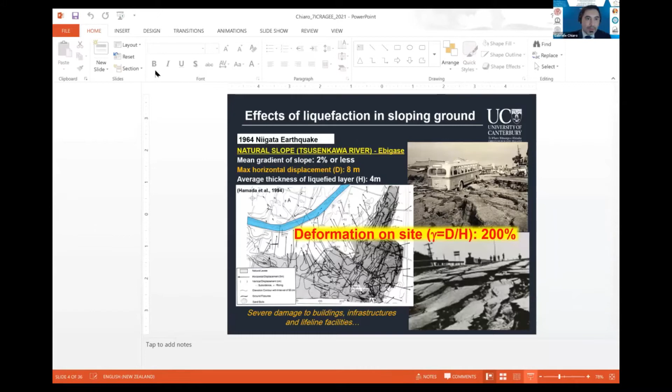It is my great pleasure to deliver this State of the Art and Practice lecture, and I would like to thank the organizing committee for giving me this great opportunity. I just realized my bio was a bit old since we have COVID - in the meantime, I was promoted to associate professor at the University of Canterbury.

The topic I'm going to cover today is the cyclic resistance and large deformation characteristics of sand under sloping ground conditions, and I will provide some insight using a state-of-the-art apparatus, the torsional shear apparatus, which is capable of achieving extremely large deformation.

This is the outline of my presentation. I will start with some background information and then go through the key objectives of the research that I'm going to summarize today. This is research that started more or less 10 years ago in collaboration with the University of Tokyo. Then I will talk about the testing apparatus, and then I will show the testing material and briefly talk about the procedures.

Then I will really focus on the test results, and I will talk about the failure modes observed in the laboratory. And then I will move on to the cyclic resistance of sandy soils, looking from small strains up to extremely large strains, and I will provide some new insight regarding the large strains. Then I will talk about the strain localizations that can be observed in the laboratory in liquefied soils.

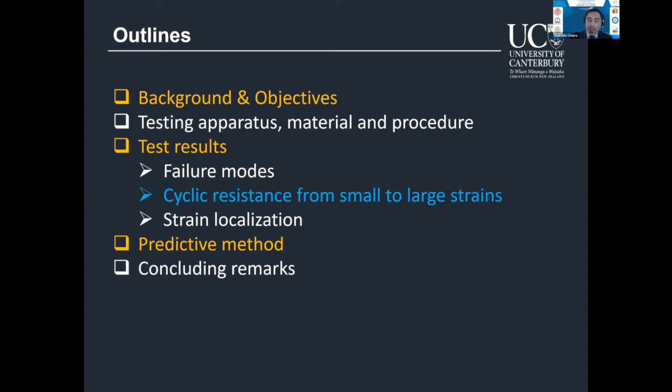So let's start with some background. The photo shown here shows the failure of a slope that occurred in 1964 in Japan following the Niigata earthquake. It was a moderate, gentle slope, with an inclination of only 2% or even less.

But as you can see from the photos, the damage to building infrastructure, roads, and lifeline facilities was quite severe. So it's only a 2% slope gradient, but it's a slope made of clean sand, dune sand, which was very close to the river. In fact, the slope moved toward the river.

The slope moved for about 8 meters, and the photos and damage associated with the liquefaction are shown in these historical photos. The deformation was 8 meters, and if you consider the average thickness of the liquefied layer to be 4 meters, that means the deformations on site were on the order of 200%, extremely large shear deformations.

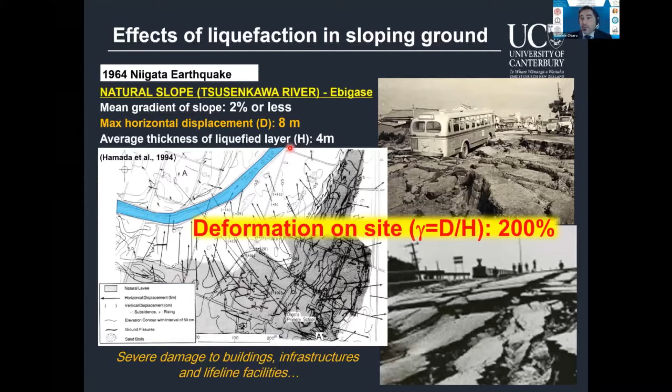So this is a historical case, but there are also more recent cases. For example, in 2015, these two photos, A1 and A2, show the liquefaction of non-plastic silty soil, with fines content of more or less 90% silt. But you can see evidence of liquefaction here, the typical sand boils and some fissures.

The liquefaction occurred in a gentle slope, again with an inclination of 1 or 2%, near the Trishuli River. As you can see here, there were large fissures and lateral spreading for many, many meters, extending backward from the river about 50 or 100 meters.

The other case I'm showing here is the failure of a slope that occurred in Japan due to the Kumamoto earthquake. In this particular case, it's a volcanic soil, pumice soil, weathered pumice soil, which was sandwiched between impermeable layers of clay. I will come back to this particular slope later on with more information.

The peculiarity is that the slope again was only 6% in terms of inclination, but the soil covered a distance of 600 meters from the source to the deposition area, and on the way impacted a new residential complex, destroying 7 houses and killing 5 people.

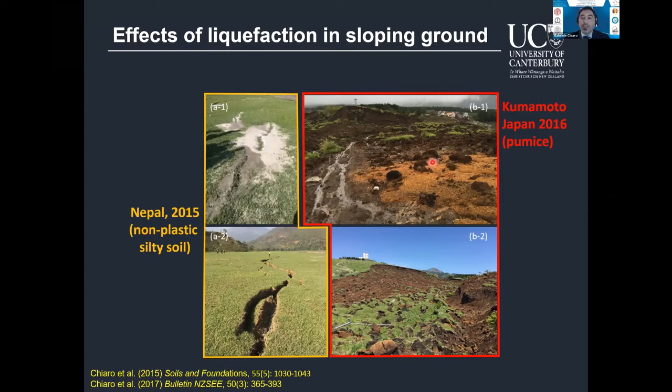So I've shown some historical cases and more recent cases, but the key issue is that when it comes to liquefaction of sands in sloping ground, we still have a lot of uncertainties, and our capability to predict liquefaction is still largely unknown. The reason is that the phenomenon is quite complex, and our capability to test this material in the laboratory is still challenging.

One of the key aspects is that if you look at the stress condition of sloping ground before an earthquake, we already have a component of initial static shear due to gravitational effects, in addition to the vertical and horizontal stresses. When an earthquake occurs, we have an additional component, the cyclic stress ratio, which is in addition to the initial static shear. The sum of these two components, static and cyclic stress ratio, gives us the total stresses.

The one I call maximum shear stress is when the cyclic shear stress and the static shear stress act in the same direction, and the minimum is when the static and cyclic shear stresses act in opposite directions. The combination of tau max and tau min tells us how soils really experience cyclic loading. In some cases, this combination gives us the classic stress reversal, where loads change from a maximum positive value to a minimum negative value. I will show you that this is the key factor for liquefaction.

But if the slope inclination is more than 6 or 10%, meaning the static shear is quite high, very often we don't have reversal stresses. This is another key factor I'll show later, that might not trigger liquefaction but still might be detrimental and might trigger shear failure of the soil.

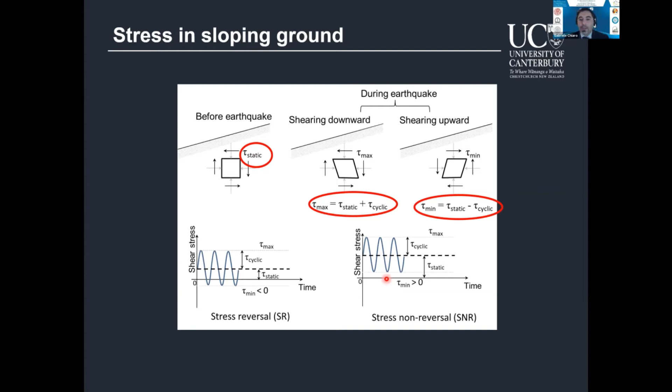So the initial static shear has been recognized as one of the key aspects regarding liquefaction in sloping ground, and to evaluate the effect of liquefaction.

Yet if you look at some of the early studies, starting in 1967, just after the 1964 earthquakes, with another earthquake in Alaska at the same time, many studies have been done using triaxial apparatus but also trying to mimic simple shear conditions, which are more realistic of the stress conditions in the field. But if you look at some of the results and conclusions of these preliminary studies, we can see that the effect of static shear is not yet clear.

Some tests show the liquefaction resistance increases with initial static shear. Some other tests show that it decreases with initial static shear. This isn't only an issue between different testing devices, but even within the same testing apparatus, whether torsional or simple shear conditions, it's still not very clear what the effect of initial static shear is.

If we have a close look, we realize some of the inconsistency might be because the relative density of the soils tested were different, or the criteria to define liquefaction was different, or the level of deformation used to define liquefaction, or the strength of the soil were different.

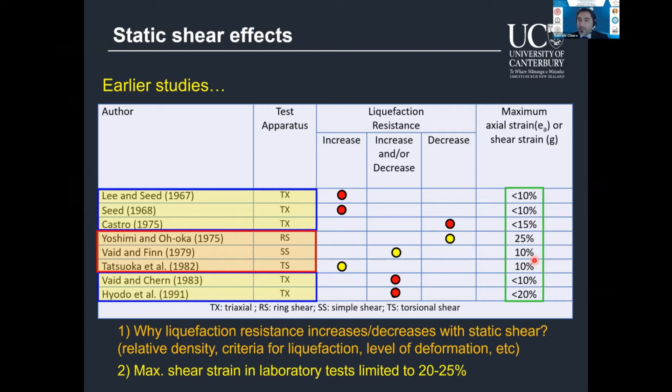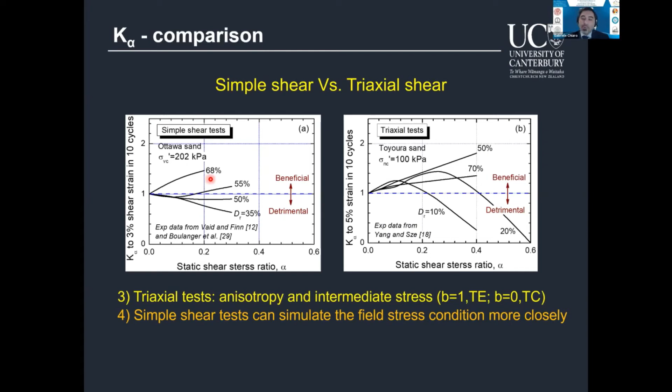But the question is, is the triaxial apparatus the best one to reproduce the stress conditions in the field? What we evaluate in the laboratory is the true behavior of soils under triaxial conditions, but they are not really representative of field conditions. On the other hand, the simple shear apparatus helps us, or provides an opportunity, to more closely replicate the simple shear conditions in the field.

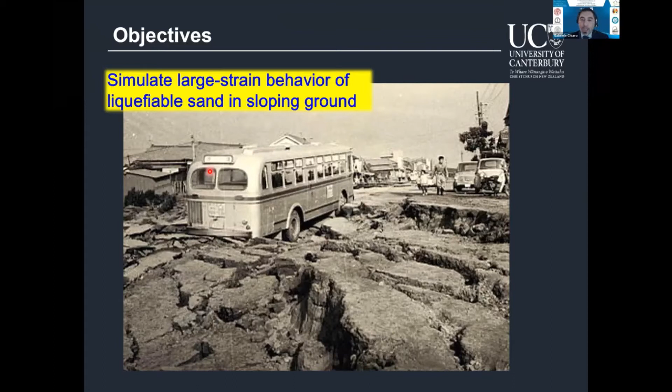In order to clarify some aspects regarding the effect of static shear on the liquefaction behavior of soil in sloping ground, and also with the intention to evaluate the large-strain behavior of soils, we use a special apparatus to simulate the larger strain behavior of liquefiable sand sloping ground. That was the key objective, but we also try to identify the potential failure modes of the soils, depending on the combination of static and cyclic stress ratios.

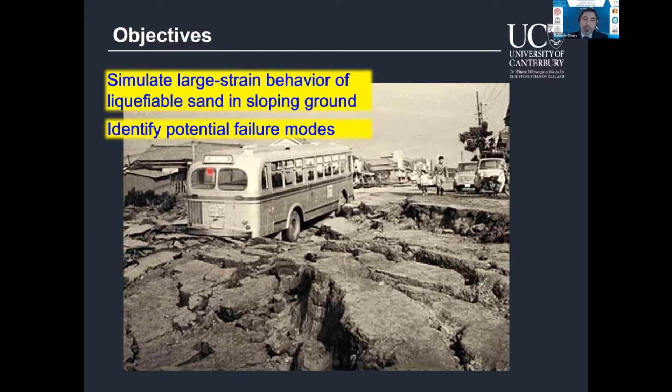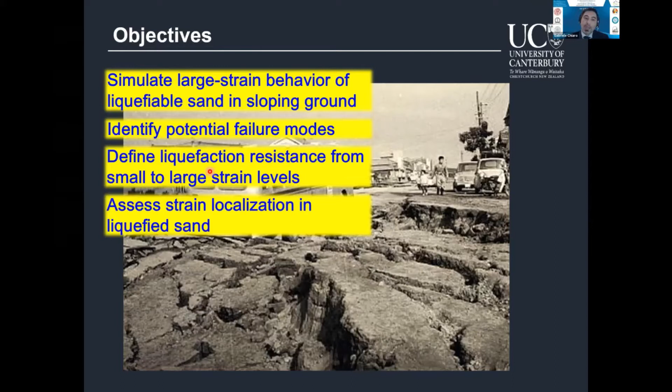We define the liquefaction resistance from small to large strain levels, and also assess the strain localization in liquefied sands. To do so, we try to simulate the behavior of soil as realistically as possible. In this study, we use different combinations of static shear stress, cyclic shear stress, and soil density. Because the tests I'm going to show are quite time consuming, each test takes at least one week, and on average only one test every month is successful. There is a lot that can go wrong in these tests.

In this particular presentation, I'm not going to touch on the confining pressure effect. I'll only focus on the first three key factors.

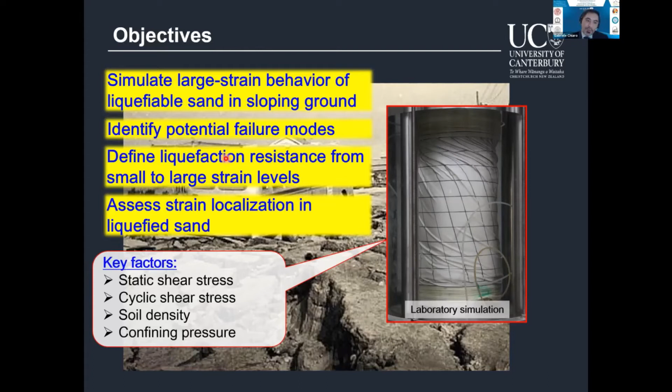Moving on to the testing apparatus: the apparatus we use in this study is a large-strain torsion shear apparatus. This is not a commercial apparatus, but a unique one built at the University of Tokyo with very unique capabilities. We test using a hollow cylinder apparatus, where we can control several degrees of freedom: vertical stress, horizontal stress, and torsion shear stress. In terms of vertical and horizontal stress, you can also control both the outer and inner pressure acting on the specimen.

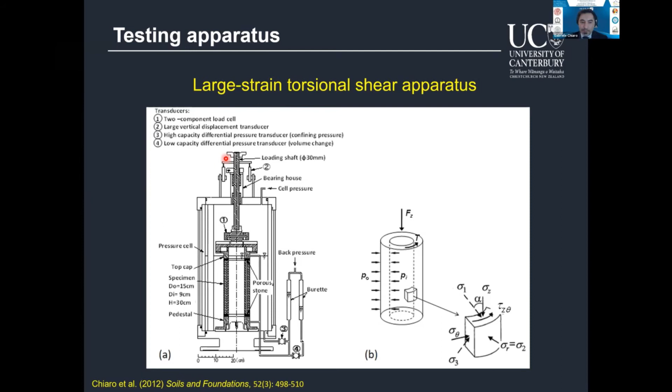The apparatus is also capable of applying quasi-simple shear conditions by mechanically locking the height of the specimen, so vertical deformation is zero, and you can apply shear directly by rotating the top cap. For true simple shear conditions, you have to assume radial and circumferential deformations might occur but will self-balance each other, so we call these quasi-simple shear conditions.

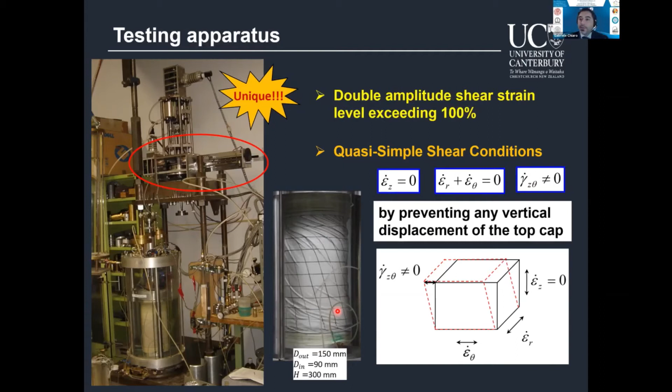This is a photo of a typical specimen at large deformation. The specimen we test has an outer diameter of 150 millimeters, an inner diameter of 90 millimeters, and a height of 300 millimeters—extremely large specimens.

The material tested in this presentation is Toyoura sand, a clean quartz-rich sand heavily studied in Japan, so we know all the information and can easily compare our results with past studies, including triaxial apparatus studies and other types of studies.

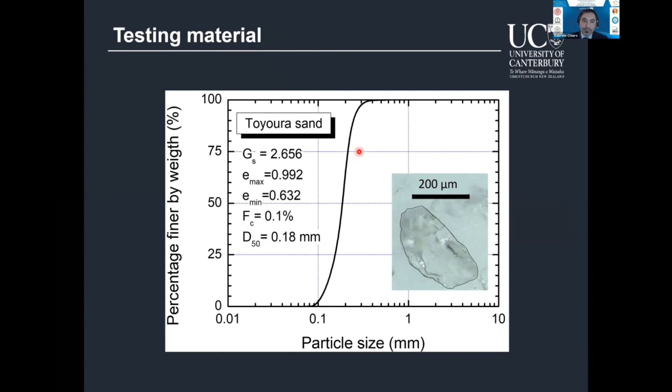We have done a large number of tests. The tests I summarize in the paper are only 26, but in the meantime I had a PhD student finishing, so we have more test results. In the yellow table, I will use some additional test results on relatively dense sand. I will talk about the behavior of relatively loose to medium sand, around 40% relative density, but also use data for dense sand with relative density about 70–75%.

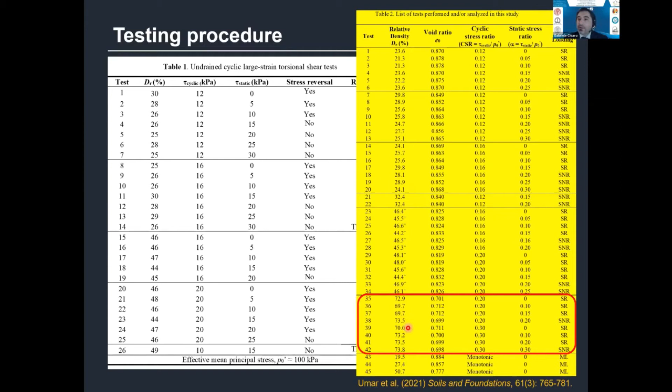Now moving on to the test results. Before starting, I'll use this table. The idea is that the initial static shear is a key component in the liquefaction behavior of sand in sloping ground. But we also know that the combination of static shear and cyclic shear might have a key effect.

If the cyclic stress ratio is greater than the static shear, the soil will experience so-called reversal stress conditions. But if the static shear is larger than the cyclic shear, then the stress will always be positive and non-reversal stress conditions will apply. On the other hand, the maximum shear stress is also an important parameter—this is the combination, the sum of the static and cyclic stress ratios.

But also, as I will show later on, the comparison of the maximum shear stress we apply during the tests compared with the strength of the soil, this tau peak, will have an influence. So if you put together all of this combination of stresses, we might expect four different behavioral zones in terms of liquefaction, non-liquefaction, and also a safe zone.

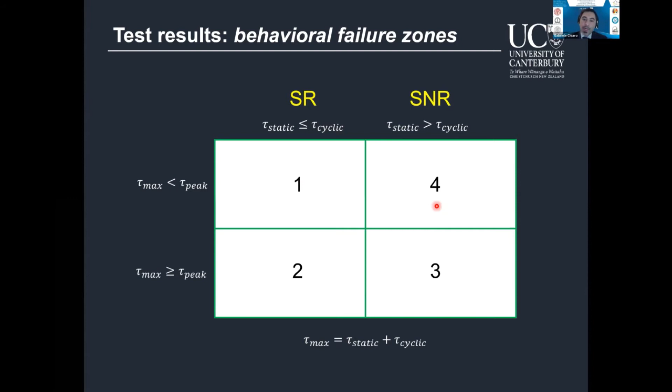So I will use this table here to explain what are the mechanisms from now ahead. But before that, I want to clarify what is this tau peak, also known as tau undrained.

Basically, if you perform a monotonic test, you might reach a transient peak behavior here, and this peak will be the initiation of instability in sandy soils and in relatively loose soils. After this peak, you might experience the so-called static liquefaction. If the soil is medium dense, you might have a limited flow, and then when reaching the phase transformation line, the soil will recover certain strength and will follow the failure line.

So I will use the concept of tau peak to explain why we can expect certain behavior in soil with the initial static shear or not.

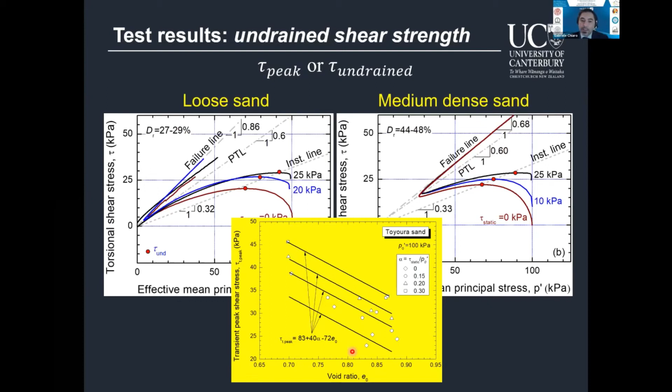In terms of tau peak, this undrained shear strength of the soils depends on many factors. It depends on the initial static shear, depends on the density of the soil, and because of that, it might be easily estimated based on laboratory tests. So there are equations available like the one I'm showing here.

So the first failure mechanism I want to talk about is the one I call potential large shear deformation under cyclic loading. And I'm going to use the case of loose sand, medium dense sand, and dense sand.

In the case of dense soils, actually the soil will not experience large deformation, even though it undergoes many cycles of loading. So in the end, in this particular case, the soil could experience large deformations, but the question is how many cycles we need, or how strong an earthquake we need, to induce this kind of failure. So potentially, yes, the soil could undergo liquefaction and develop large deformation, but the reality is only if an earthquake is strong enough.

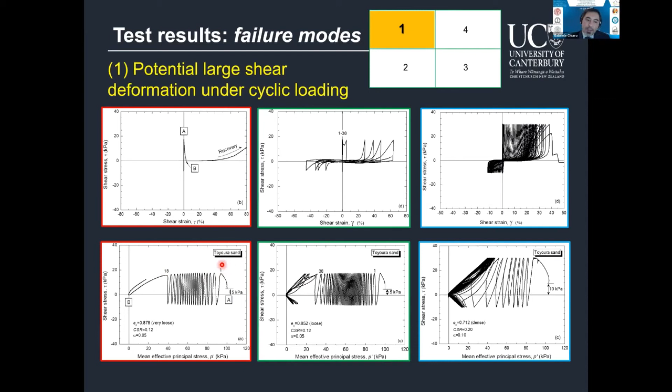In this first case, and I'll go back quickly — in this particular case, the behavior occurs because the maximum shear stress we apply in the soils does not exceed what is the peak strength of the soil.

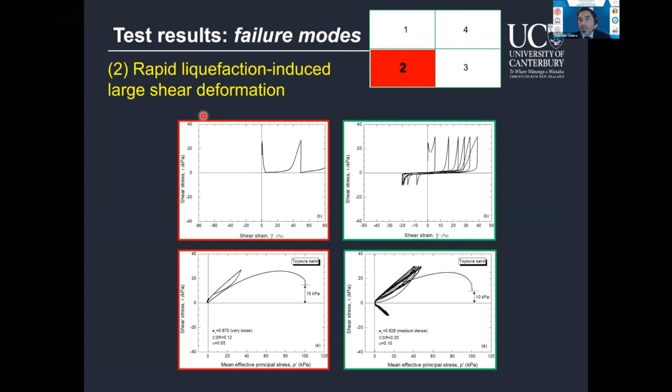In this second case, it's clear that the maximum shear stress of the soil exceeded the peak strength of the soils. In this particular case, the soils might easily reach liquefaction, and once they reach liquefaction, the soil will experience large deformation. So compared to the case before, rapid or flow liquefaction occurs within a few loading cycles, and therefore large deformation might be expected, even in the range of 50% or more.

In the third case, the soil does not show liquefaction. This is the non-reversal case, but at larger deformation, the soil will experience shear failure. So this is a completely different failure mechanism.

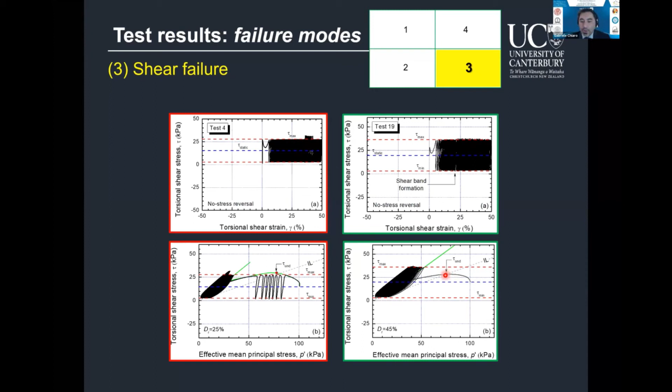And this is because the maximum shear stress of the soil will exceed the strength of the soil at this point here. But if you perform a similar test and now the maximum shear stress does not exceed the strength of the soil, then the soil will not develop large deformations, even though you apply 100 loading cycles.

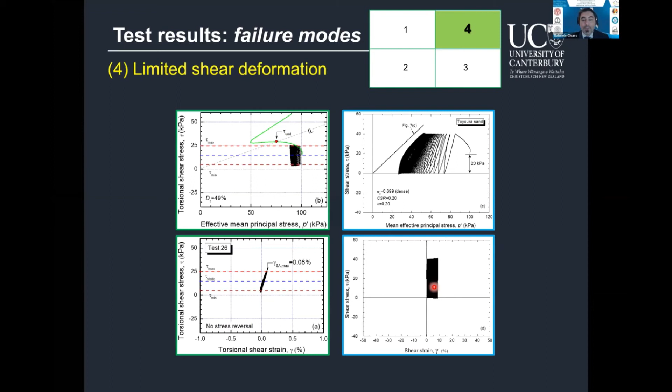So these are the four failure mechanisms you can expect, considering the combination of the initial static shear, cyclic shear, and also looking at the strength of the soil. And this is a summary of the typical resistance of the soil in terms of alpha, the static stress ratio, with number of cycles, for 3%, 7.5%, and 20% deformation.

Usually, loose sand will show that as you increase the initial static shear, the tendency of the soil to experience large deformations increases. This means the initial static shear has a detrimental effect on the deformation of the soil. For medium dense sand and large deformations, it seems that at certain points there is a change in behavior where the soil starts to gain certain strength, and this was not observed for small deformations.

If you look now at much larger cyclic stress ratios applied to medium dense sand, the change from detrimental to beneficial occurs when we have the change between non-reversal and reversal stress. It means that when the initial static shear becomes larger than the cyclic shear. For dense sand, it looks like the effect of initial static shear is not as severe as in the case of loose sand.

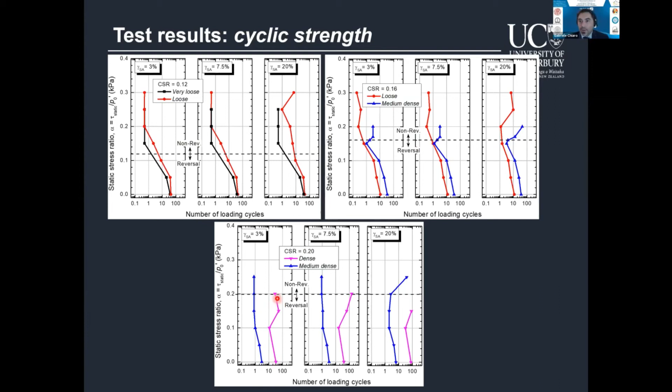This is another figure that may help explain the behavior. Here we have the cyclic stress ratio evaluated at 10 cycles, for 3%, 7.5%, and 20% strain, across loose sand, medium dense sand, and dense sand. Again we have similar results and similar tendency: as we increase the initial static shear, the cyclic resistance of the soil decreases for relatively loose and medium dense sand, but quickly recovers for dense sand. In the case of 20%, this strain was not achieved in the laboratory for dense soil—it's a very strong soil—but was achieved for loose sand and medium dense sand. In general, the resistance of the soil decreases until reaching the reversal line, and then there is a change, and the soil starts to recover strength.

You can plot the same results in terms of K alpha, which may be a better parameter, and you obtain similar results. In this case, it seems that K alpha at 7.5% is very similar for all three densities, but the way the soil recovers strength then depends on the density. In dense soils, the recovery and beneficial effect of initial static shear are visible much earlier than in the medium dense and loose soil.

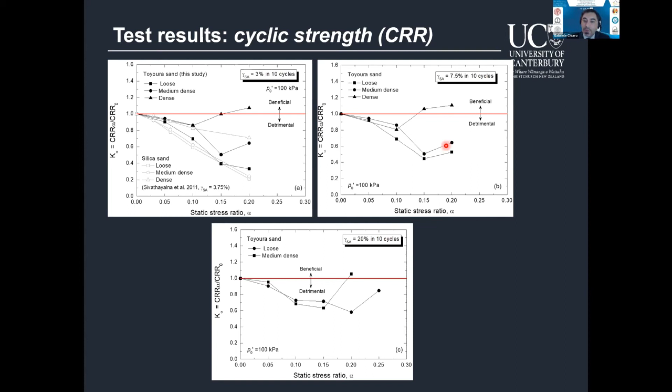This is a quick comparison between the tests performed in this study and other relevant tests found in the literature—referring here to the black line, the 7.5% curve, for dense and loose sand. The test results here show similar trends to what was observed in simple shear tests for medium dense sand, and also for loose sand and medium dense sand.

When we compare with the triaxial tests, the trend is quite different. As I mentioned before, this is because the conditions of deformation of the soil in triaxial tests versus simple shear conditions are quite different, and we have to be careful how we evaluate the strength of the soils and how we then use the results.

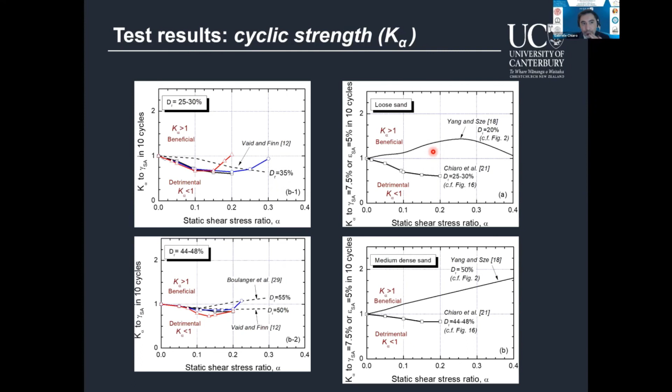What we notice in the laboratory is that yes, we can achieve larger deformations, but at certain points the deformations are no longer uniform in the specimen. For example, at larger deformations, the bottom part of the specimen remains relatively uniform, but the top part has much larger deformations. So we are able to identify where this change in behavior occurs, from uniform to non-uniform deformation, because that is the limit of deformation you can use from laboratory tests to estimate the strength of the soil.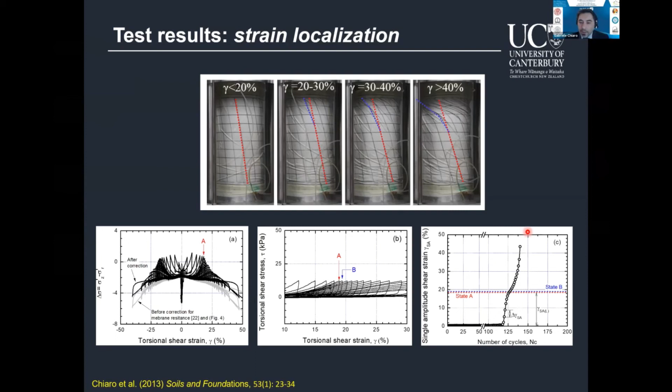This kind of approach has never been done properly in triaxial tests, and it's very difficult to evaluate in simple shear devices where you cannot see the specimen. But to give you an idea, you can evaluate the difference between the vertical stress and the radial stress if you track the deformation of the specimen, and identify point A and point B, which gives a clear understanding of how the deformation changes. You can do this exercise for many specimens with different densities and other parameters, and obtain a curve that helps summarize the limit shear strain needed to achieve shear band formation, even in liquefiable soils.

It is clear that density is one of the key factors. Looser soils tend to have strain localization with much larger strains, while dense soils tend to have shear bands with much lower deformations. But strain localization also depends on other factors like initial static shear and confining pressures. So we identify another parameter, the undrained shear strength of the soils, which captures in a better way what is the limiting shear strain, because it incorporates density, confining pressure, and initial static shear.

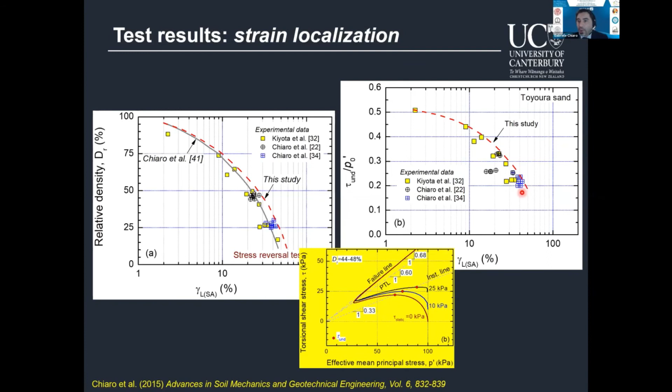To conclude, we used this method to evaluate and back-calculate the behavior of slopes observed during the failure of slopes during past earthquakes. This is the Kumamoto earthquake, the Takanodai landslide, with 6% degree of inclination. This is how the slope looks. The source area is here, and what I'm showing in the cross section is the longest length. The soil moved from here to here, about 600 meters.

We did some limit equilibrium analysis, and the factor of safety before the earthquake was 3.1. We also did some seismic limit equilibrium analysis, and found that the factor of safety dropped to 0.8 during the earthquake, but it did not provide information about liquefaction behavior.

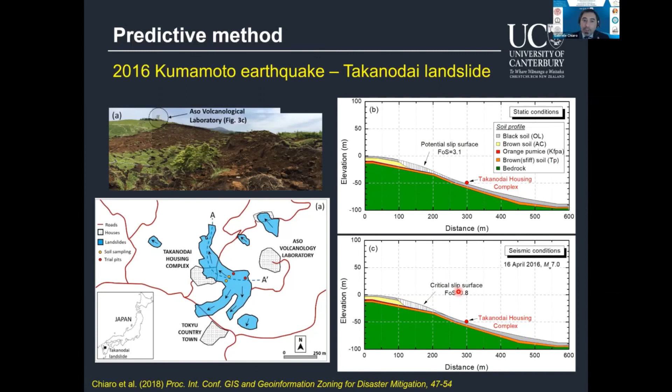So then we did some laboratory tests. We recovered samples from these areas and tested them, comparing with Toyoura sand, and found that this soil behavior could be similar to a medium density sand. Then we evaluated the K-alpha using a simple predictive model, where we can see that if you consider the strongest earthquake of the Kumamoto earthquake, this model might predict liquefaction. But if you consider the foreshock, which was much weaker, liquefaction did not occur, and this matches reality.

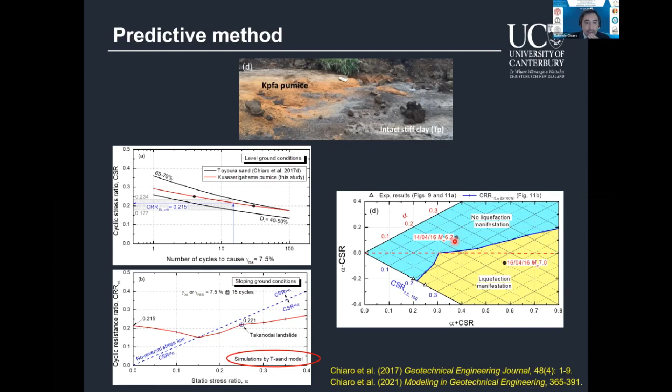Another case is the Niigata earthquake. We had NSPT values and field observations for this particular slope. There was a liquefiable soil layer, quite shallow, that liquefied, and again we used this simple method with the CRR line. Our observations of liquefaction zones and no-liquefaction zones match with observations from Hamada et al., 1994. So my time is finished.

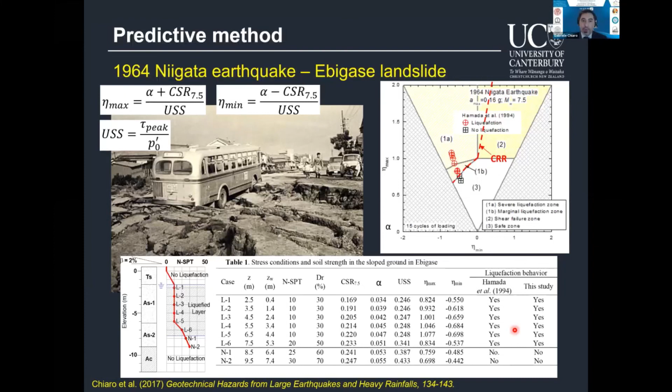We'll go quickly through the conclusions. The evaluation of the effect of initial shear on the liquefaction resistance of sandy soils is significantly affected by testing conditions, simple shear or triaxial shear, and we should be very careful how we investigate and use the data.

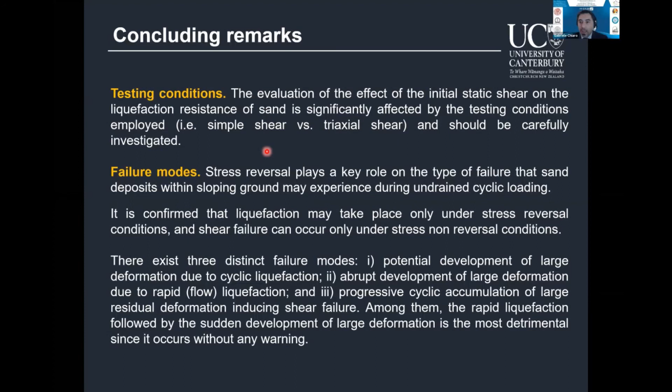Stress reversal plays a key role on the failure mode of the sand; liquefaction can only occur under stress reversal conditions, while under non-reversal stress conditions liquefaction will not occur, but shear failure might occur. There are different failure mechanisms, from potential development of large deformations to flow failure to shear failure, and the most detrimental is flow liquefaction because it happens without any warning signal.

The cyclic strength of the soils seems to decrease, irrespective of density, with increasing initial static shear. Therefore, only under non-reversal stress conditions do we have the beneficial effect of initial static shear, which is in opposition to what we found in the actual tests.

We noticed that when you reach large deformations in any test, the soil, even liquefiable soils, might undergo strain localization. Therefore it's very important to understand when strain localization occurs, because that might affect the results and the way we evaluate the strength of the soil.

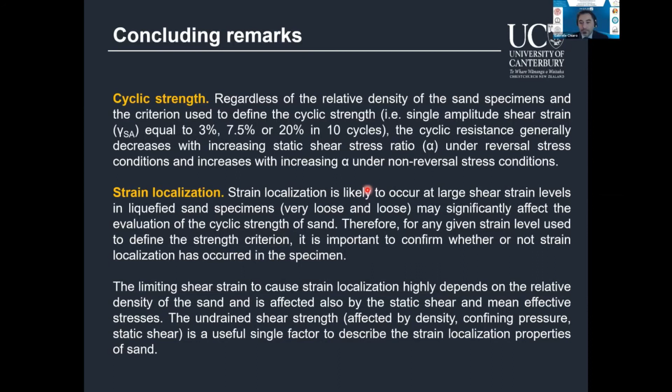Before I conclude, I would like to really thank the key collaborators from the University of Tokyo: Professor Junichi Koseki, my former PhD supervisor; Takashi Kiyota, who allows me to still use this large apparatus nowadays; Takashi Sato, who is the developer of the apparatus; and Muhammad Umar, my former master's and PhD student, who has done most of the tests I showed today.

Thank you very much for your kind attention.